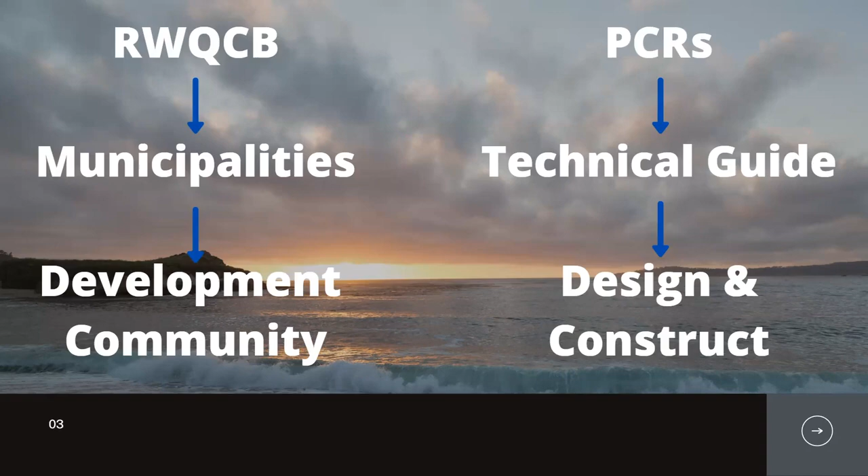One of the first questions you need to ask yourself in post-construction compliance is, where is my project located? For the PCR specifically, your question is, am I within an MS4 permit boundary? That's the municipal permit issued by the State Water Board. In general, the MS4 permit boundaries follow urbanized areas designated by the census. So if you are within city limits or within an urbanized area, likely you are within an MS4 boundary. Check with your local jurisdiction to confirm if you think you might be in or out.

Now, if you are within the MS4 permit boundary, you need to follow the Central Coast PCRs. If you are outside of the permit boundary, there likely are other local requirements that may be similar to the PCRs. And if your project disturbs over 1 acre, you will need to follow the state water board requirements for post-construction as part of the SWPPP program. What I'm talking about today is for the PCRs, meaning projects that are within MS4 permit boundaries.

Another aspect of location is where you are relative to watershed management zones. When the regional board was developing the PCRs, they designated these watershed management zones, which identify the specific requirements your project will need to follow. There's mapping for watershed management zones available on the regional board's website, often linked through the technical guides.

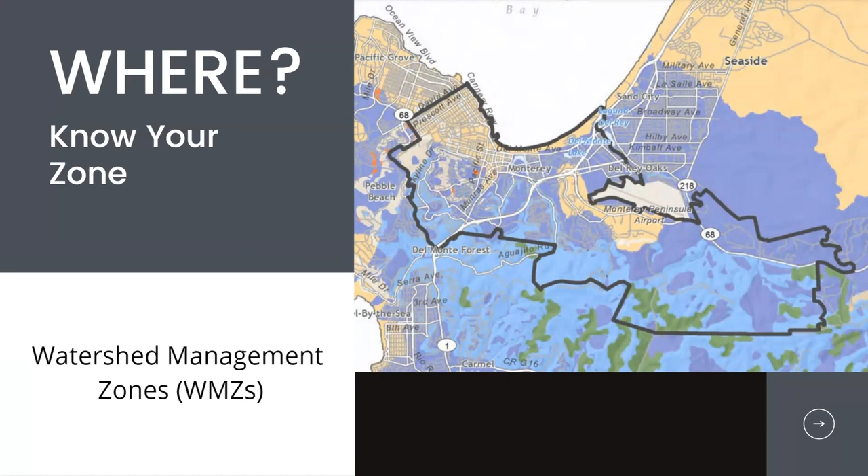Now that you've identified you are within the MS4 permit boundary, let's understand what projects need to comply with the PCRs. In general, projects that create or replace more than 2,500 square feet of impervious surface need to comply with the PCRs. There are some very specific exemptions for project types, and I've listed the more common ones here.

The first is linear utilities. So let's say you are constructing a new sewer or replacing a water line - any trenching, any removal of pavement and replacement of pavement does not trigger post-construction requirements. Another is temporary structures. If you have a structure that will be in place for less than 6 months, maybe some sort of construction trailer associated with your project, any temporary structure is not part of PCR compliance.

Maintenance projects are not considered part of the regulated project for PCRs, and there's specific criteria for maintenance. In general, maintenance of a street section means you are not changing the way that stormwater flows - that's your gut check. If you're changing the way stormwater flows through regrading or expanding a street section, you no longer fall under that criteria of maintenance.

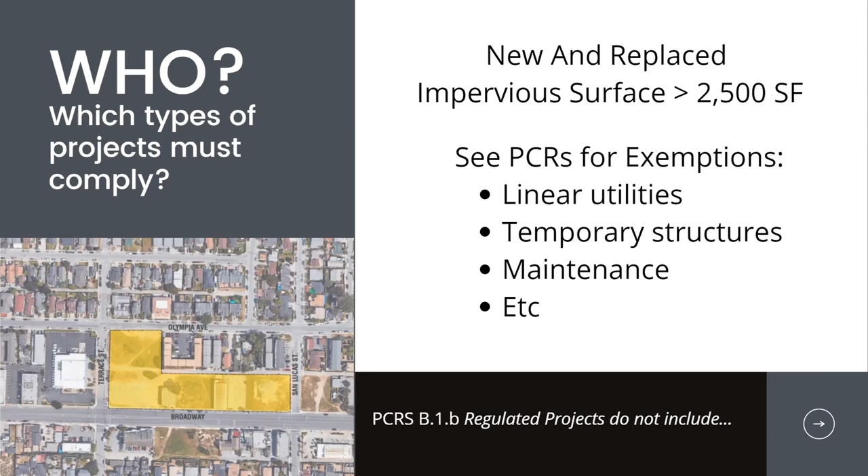This is treatment of the 85th percentile storm. PR3, or Tier 3, is on-site retention of either the 85th or 95th percentile storm, depending upon what watershed management zone you are in. Threshold 4, PR4, is peak flow management - this is matching your pre-development hydrology for the 2 through 10-year storms.

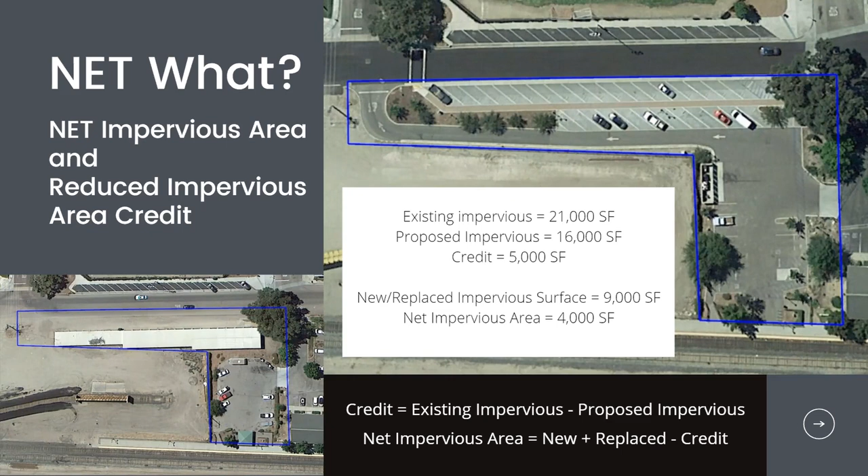In my opinion, this was a win-win. It was a win for the city because it made PCR compliance pretty streamlined, and it was a win for stormwater because we reduced impervious area, increased the amount of retention that could occur on the site, and improved stormwater quality.

What is required for submittals for PCR compliance? During the planning phase of a project, you need to prepare and submit a preliminary stormwater control plan. The purpose of this plan is to prove that your project can comply with post-construction requirements. You may use simplified calculations or typical cross sections, but you need to show a minimum amount of detail to prove compliance.

That level of detail will vary depending on your type of project. During the planning phase, work with your local jurisdiction to confirm you're providing enough detail. During the detailed design phase, your construction documents, you will prepare a final stormwater control plan with complete calculations for all stormwater design relative to the PCRs, corresponding to all elevations, inverts, and sections on your construction documents.

At this time, you will also prepare a draft operations and maintenance plan to be submitted prior to construction. During construction, specific inspections are required to comply with the PCRs, documenting the construction of your stormwater control measures, or SCMs. The engineer of record must certify that those inspections occurred during construction. Following construction, you prepare your final O&M plan, based on record drawings and any changes that occurred during the construction phase, and at that time you also prepare a maintenance agreement.

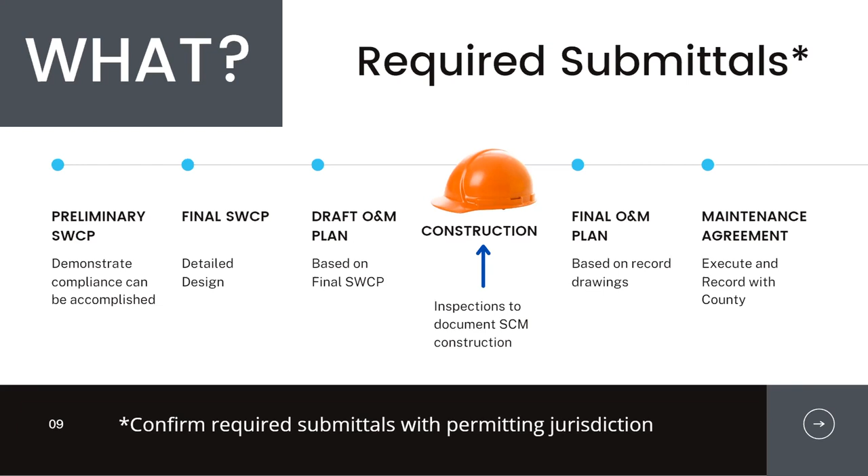Talking more about the O&M plan and maintenance agreement: the maintenance agreement is recorded with the deed and lives with the project in perpetuity. The O&M plan is an attachment to the maintenance agreement and is intended to be a living document—updated over time, with annual certifications made to show that operations and maintenance is occurring on the project.

That final O&M plan needs to outline your O&M procedures and your estimated annual cost for your O&M budget, and all of this needs to be recorded with the county assessor. That means it has to follow the assessor reporting requirements of black and white, 8.5 by 11, which includes the site plan that's part of your O&M plan. So it's helpful to be forward thinking when preparing your site plan exhibits, knowing they need to be legible in black and white on this smaller sheet size.

In addition, following submittal of all these documents, every year you will be required to submit a certification of maintenance to show that the O&M is actually being performed as described in the maintenance plan.

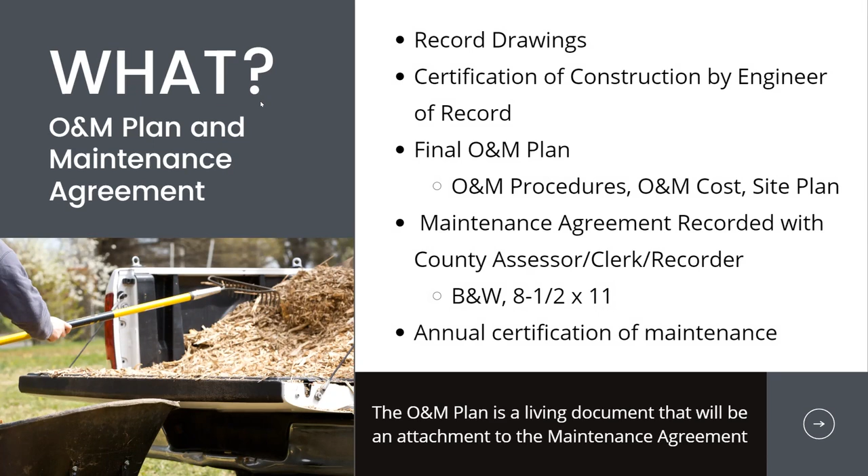Let's spend some time talking about how to comply. I will be bringing up some common questions and common challenges in PCR compliance, and the subsequent presentation will go into more detail on these items, walking through step by step the process of planning, design, and construction for an example project.

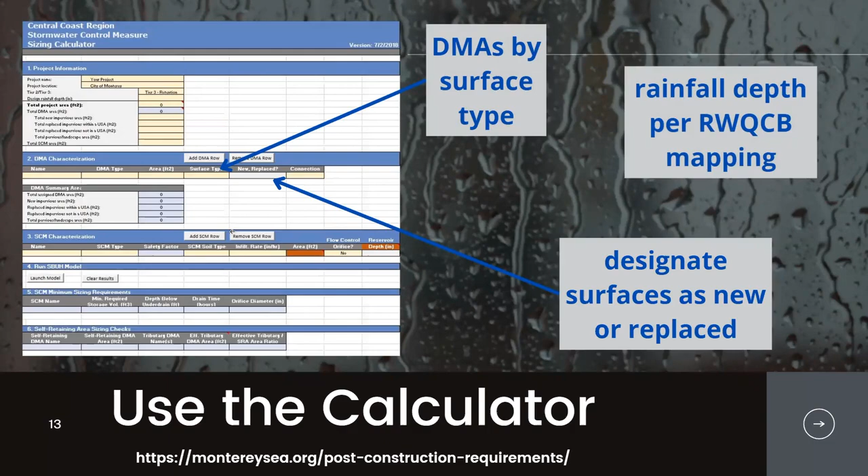Let's talk about that reduction factor for redevelopment projects. This is intended to be a credit—it's intended to incentivize and really make compliance more feasible for redevelopment projects. This multiplier is for tier 3 only, and it's for on-site retention only.

What it does is it takes your replaced impervious surface and reduces it by a factor of 0.5—it cuts it in half. So the volume that you need to retain on site is reduced compared to a surface that is new.

It's really important to understand that this is for retention only. If you are a tier 3 project, PR3 retention, you still have to comply with tier 2 stormwater quality. You have to provide stormwater quality treatment for all of the new and replaced impervious surfaces, even if you get this reduction for tier 3.

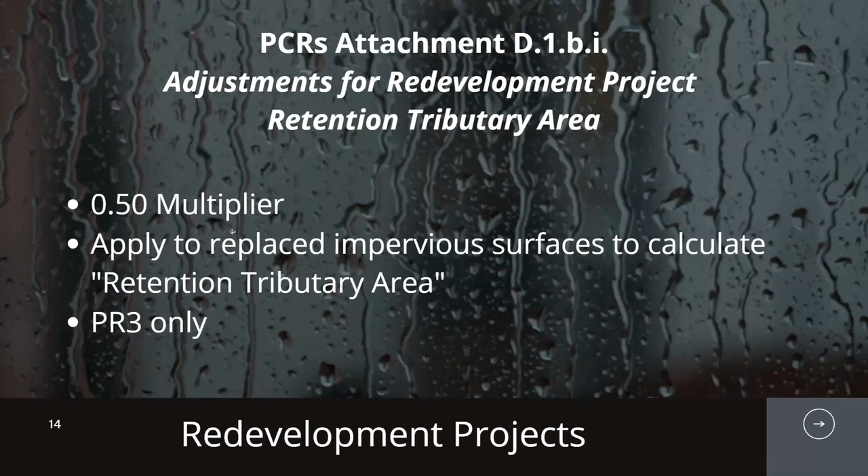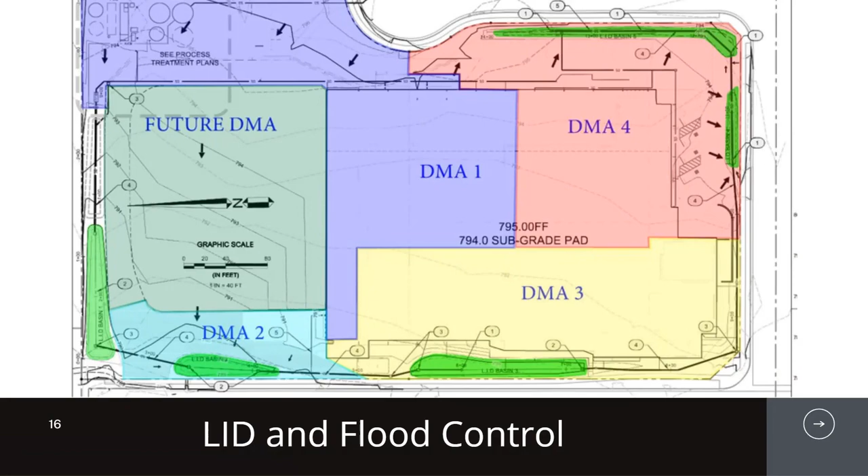The purpose of the gravel is to store runoff and allow it to infiltrate, and typically there's some level of ponding on the surface. One of the important things to note is that there should not be a filter fabric between your bioretention media and the gravel below. This is because filter fabric has been shown to clog in this use, and it can cause failure of your bioretention over time.

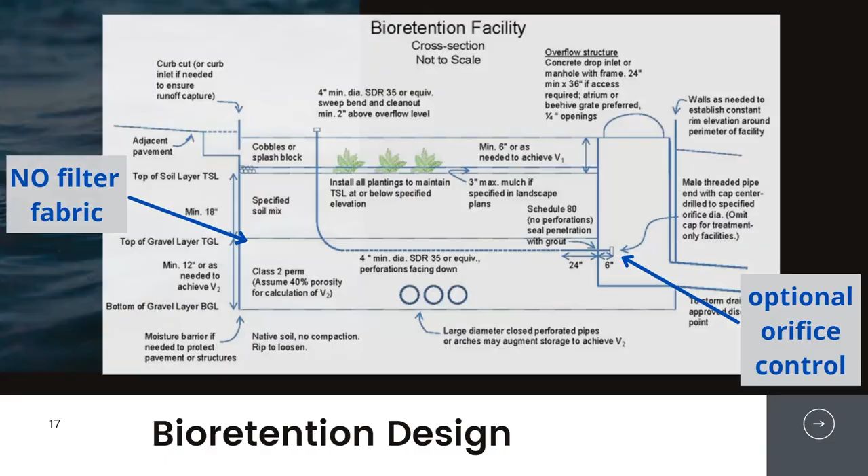Now, the downside to this is that really the only way for water to leave the basin below the elevation of this orifice is through infiltration. So if you are intending to use a riser pipe system, you want to have a lot of surety on your infiltration capacity of your soils below.

So I would only recommend this riser pipe setup in more of a sandy type soil where you have a lot of confidence in the ability of your soil to infiltrate. Otherwise, below the elevation of this orifice, you could end up with ponded water, which could cause problems for your vegetation.

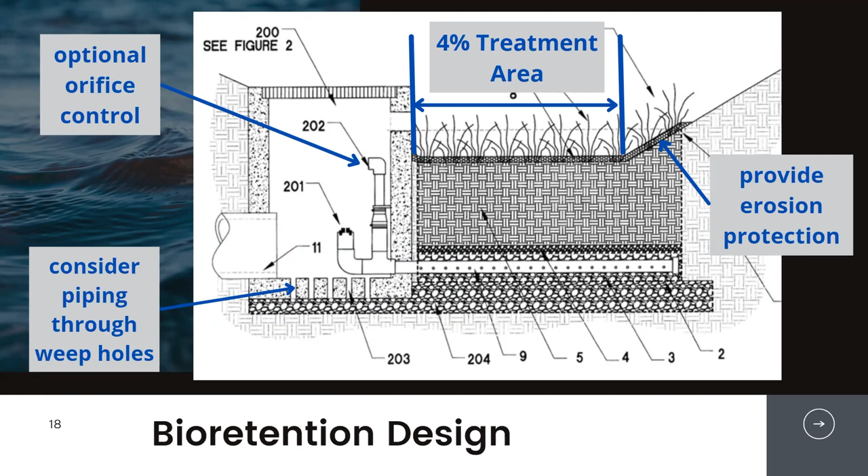One other thing I wanted to point out is the use of these drilled holes in the bottom of the concrete catch basin. This is intended to prevent standing water, and it's good practice because it can generate more infiltration area. But one thing I noticed is that these drill holes in the catch basin are really circumventing the purpose of this standpipe. So what I'm seeing is that any water stored in the media could make its way through the gravel, up through these drain holes, and out through your storm drain. This is a good idea and good practice, but be intentional about where you use them relative to the location of your underdrain and your bioretention feature.

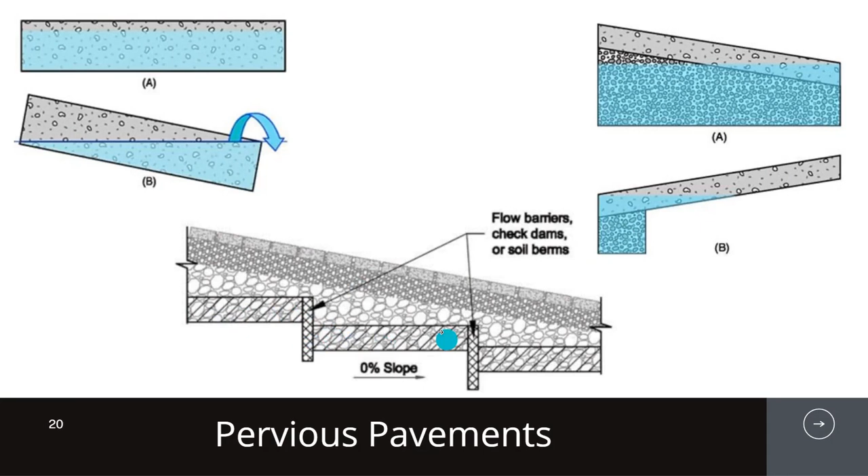One way you can accomplish something similar, but still have a greater surface area, is by using subgrade check dams, something that's going to help you create a stepped system where you're storing water and you have a larger area of infiltration.

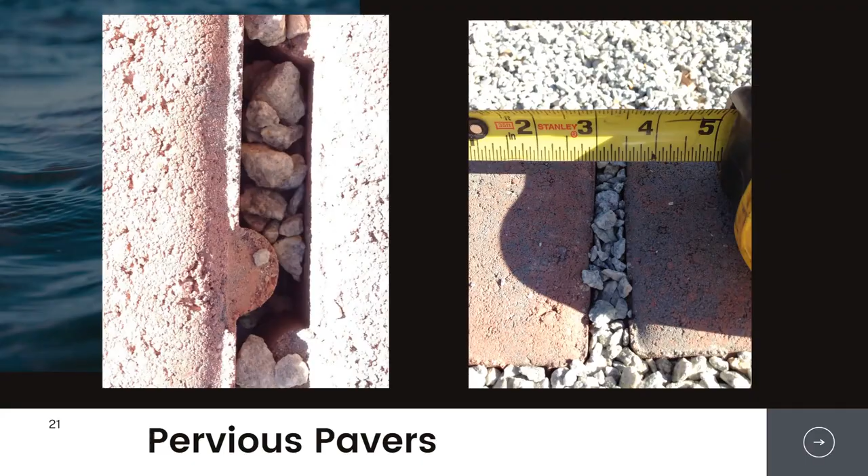In addition, especially right after construction, you're going to see some raveling—some of that gravel coming out of the gaps. You need to plan for this; it's expected and anticipated, but you need to identify who is responsible for maintenance in the first few weeks following construction, because you will have loose gravel. For these reasons, your local jurisdiction may not allow these pavers for a surface that needs to be ADA compliant, and you may need to transition to a traditional impervious paver for ADA parking stalls and paths of travel. These are a great tool, part of a suite of pervious systems, and I certainly recommend them, but you need to think carefully about where you place them and how they'll be used and maintained over time.

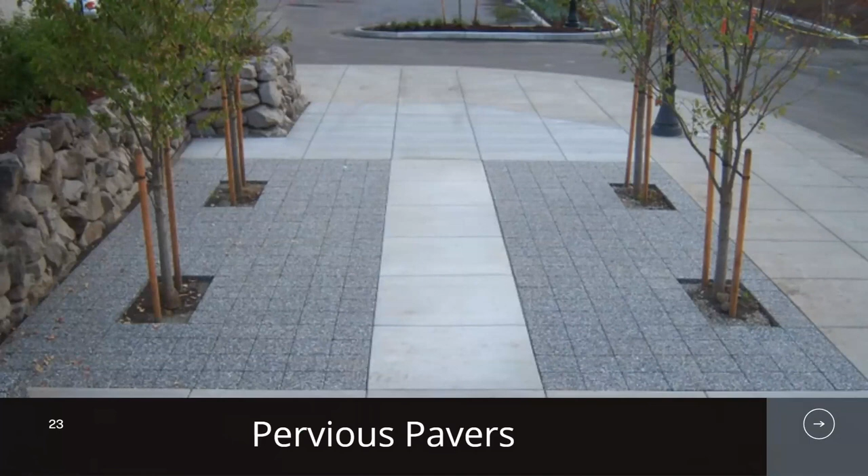Another option for pavers is actually a unit block of pervious surface—think of these as a block of pervious concrete. These pavers don't rely on a gap; the surface itself is pervious, so they're much more streamlined in terms of ADA compliance. I personally think they're better suited for projects within the right-of-way, and this example is a great use for them, being used over the root section of street trees, allowing water to infiltrate right where the trees can benefit from that runoff.

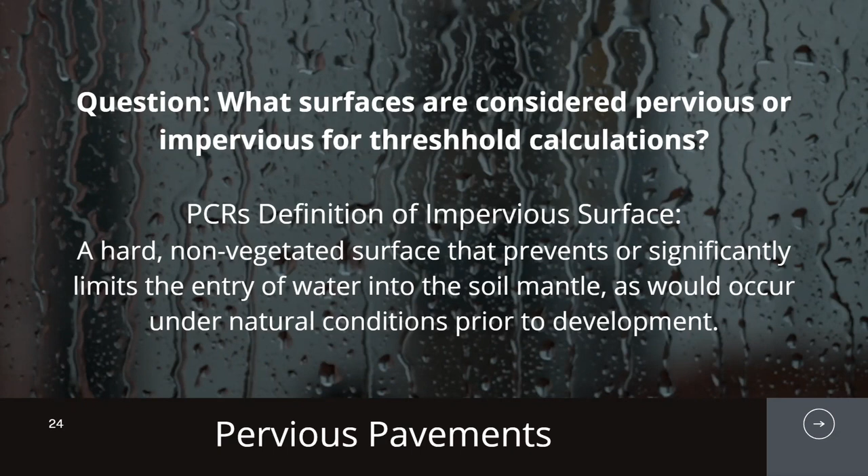One of the common questions in PCR compliance is: what surfaces are considered pervious or impervious for threshold calculations? Remember, all the tiers of the PCRs depend on your quantity of new and replaced impervious surface. How do I decide what's impervious and what's not? Let's look at the PCR's definition: a hard, non-vegetated surface that prevents or significantly limits the entry of water into the soil mantle, as would occur under natural conditions prior to development. That last part is where the judgment comes in—are you changing the way water could infiltrate into the soil prior to development? If yes, you're likely creating an impervious surface.

Always check with your local jurisdiction if you have questions on whether a surface is impervious or not.

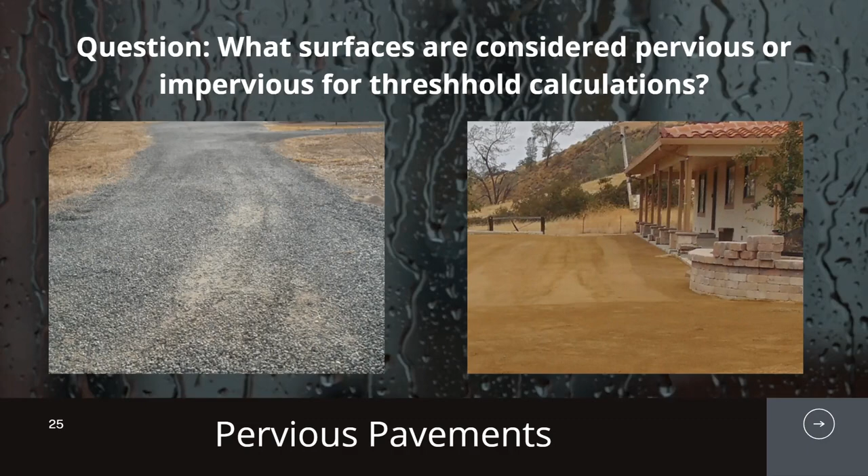The PCRs include a list of reasons why it may be technically infeasible to not provide on-site retention. One of those items is soil, item 3 in that list, sites where soil types significantly limit infiltration. The opinion of our regional board is that soil types alone do not prevent infiltration, so you may need to show more than one item on this list if soil types is one of the main reasons. Again, always check with your local jurisdiction.

One of the items I wanted to point out is what technical infeasibility means. If your site is classified as technically infeasible, this is specific for PR3 only, on-site retention, and if you qualify, this means you're no longer required to retain a specific volume. You do not have to show volume-based calculations to meet PR3.

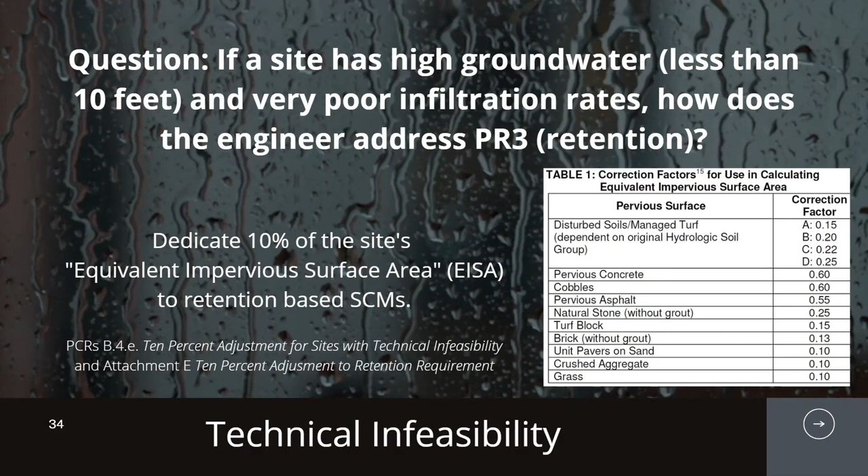When we were on our site visit, what we noticed is that there were a number of rodent holes, a number of ground squirrels burrowing from the top to the bottom. I have seen firsthand slopes have failures because of water piping through rodent holes. So if your project is within any proximity, even a few hundred feet of a slope face, you need to be working closely with your geotechnical engineer to decide if your site would be classified as technically infeasible for PR3. We did that for this particular project.

All right, next, another hot topic of infiltration testing.

Some of the common questions are: what's the difference between infiltration testing and percolation testing? How would I test for a surface stormwater control measure as opposed to a subsurface measure? How do I interpret test results? What are some appropriate factors of safety? What do I do with multiple tested infiltration rates? And what are some resources if testing is not performed?

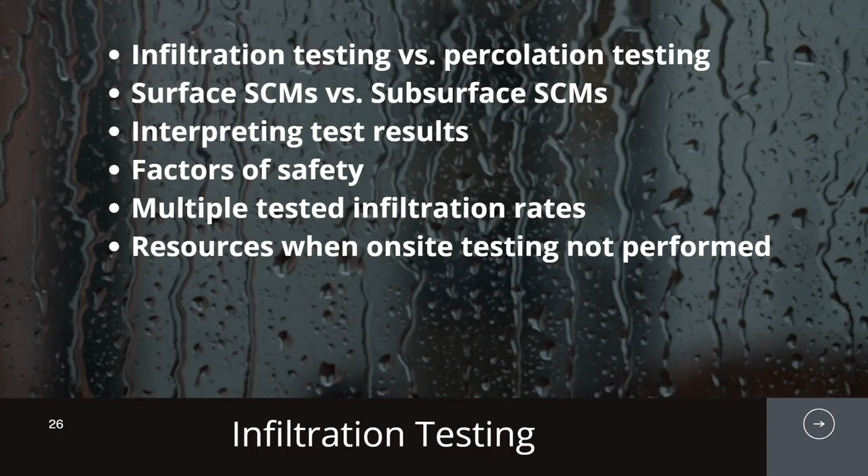In general, using bioretention as an example, you'll be at least 4 feet below existing grade. You typically have 6 inches of ponding, 18 to 24 inches of media, another 2 feet of gravel. That means the base of your facility, without any other surface grading, is probably at least 4 feet below grade, which corresponds well with the typical depth for your percolation test.

Now, the downside of the percolation test is that it does not correlate directly to a design infiltration rate. Here's the reason why: in general, in any soil profile, water is going to move faster horizontally through the profile than it will downward.

Your primary method of moving water out of your bioretention facility is downward through infiltration. Your percolation test has much more sidewall area. This vertical area of the borehole is much greater, and therefore you have more horizontal movement, which is likely going to overestimate your total infiltration capacity. Let's look at this with some numbers.

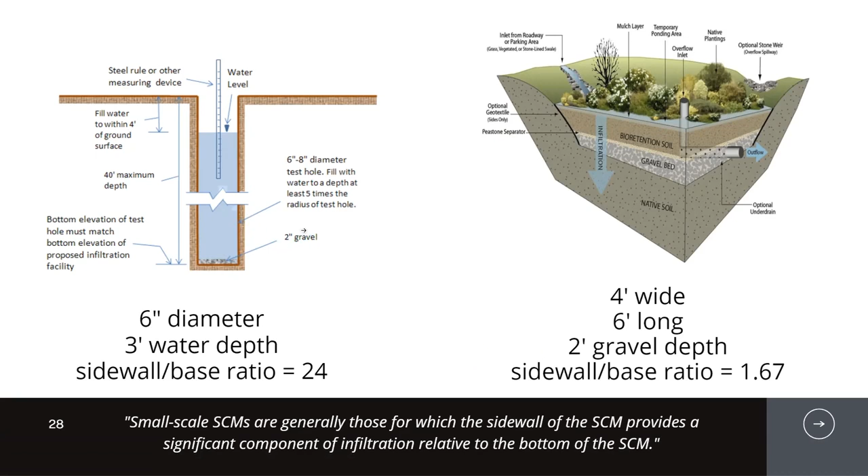So what's the solution? The percolation test has some great benefits, it's a good test, let's continue to use it. But you need to mathematically translate your percolation values into an infiltration rate, and that's done using the Porchet method. The Porchet method is basically a geometric calculation where you're taking the area of your borehole, the depth of your water, accounting for that horizontal surface area, and translating that into a vertical infiltration rate. Really the thing to know here is that your geotech needs to be taking measurements of these values and providing them to you as the design engineer so that you can run this calculation.

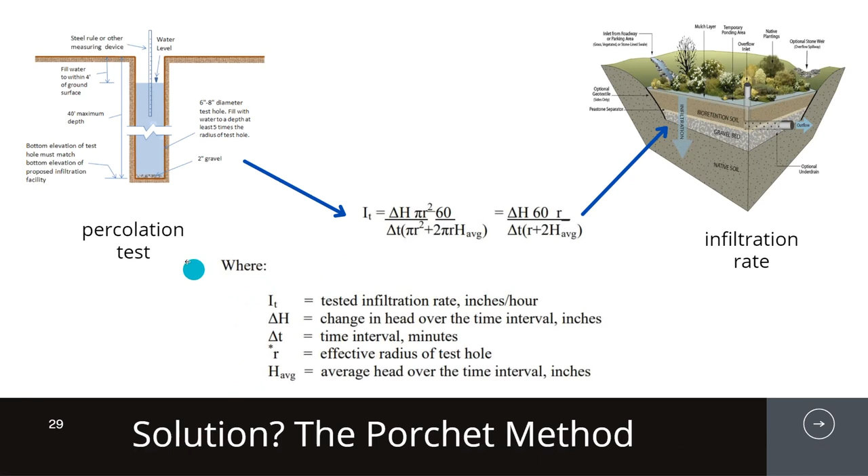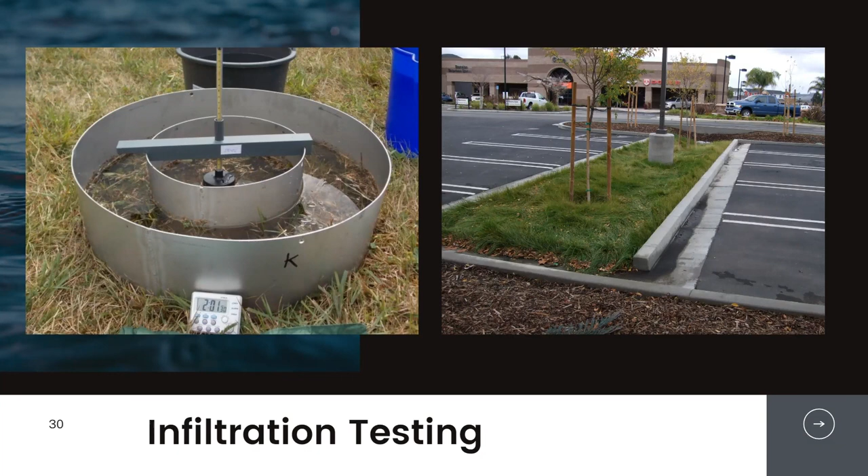So what the double ring infiltrometer is doing is creating this saturated zone around the center, and the center is where we're testing the rate of vertical movement of water through the soil. Now, by doing this at the surface in a vegetated facility, you're really gaining the benefit of the interaction of the soil and the plant roots. In that soil shown on the right, the tree roots and the roots from the vegetation are all going to increase pore space and give you a better infiltration rate. If that's what you're designing for, take credit for it, and you could do that in some cases with this double ring infiltrometer.

Now, the calculator has standard rates built in if you're not doing on-site testing, and these are based on hydrologic soil group. There's a drop down for either A, B, or CD type soils, and the calculator will automatically apply these infiltration rates. These are always available to be used. So if you don't have on-site testing, these values can be used in the calculator, and they are intended to represent a vegetated surface. If you have some other type of stormwater feature, check with your local jurisdiction to see if these rates would still apply.

There are also safety factors built into the stormwater calculator, and a safety factor of 1 is applied for bioretention, and a safety factor of 2 is applied for direct infiltration. There's a drop down for SCM type, and once you choose your type, that safety factor is automatically applied. The safety factor of 2 means you're cutting your design infiltration rate in half. The safety factor is 1 for bioretention because the purpose of the mulch on your bioretention facility is to capture the sediment that could be flowing in and reducing your infiltration capacity over time. So if you are adequately maintaining your bioretention facility, removing sediment, removing mulch, now you're providing long-term viability for that infiltration rate.

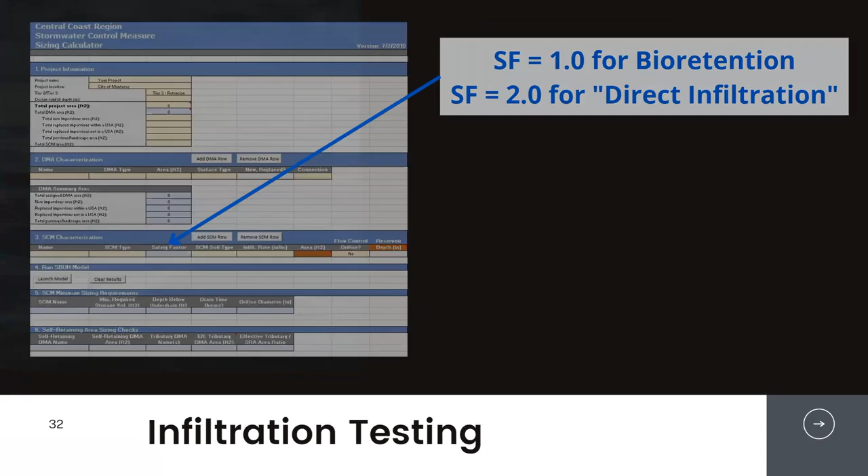Another question that comes up is for underground retention. If underground chambers are used for PR3 for on-site retention, can they also be used for PR2? And is pre-treatment required? PR2 can be achieved on a volume basis, meaning you can infiltrate water on your site, counting on the soil to treat your stormwater as it's infiltrating. So yes, you can use these chambers if allowed on your site for PR2, and pretreatment is required. This is a sentence specifically from the Monterey Regional Technical Guide that says facilities with subsurface storage require permanent structural pretreatment. So the answer is yes.

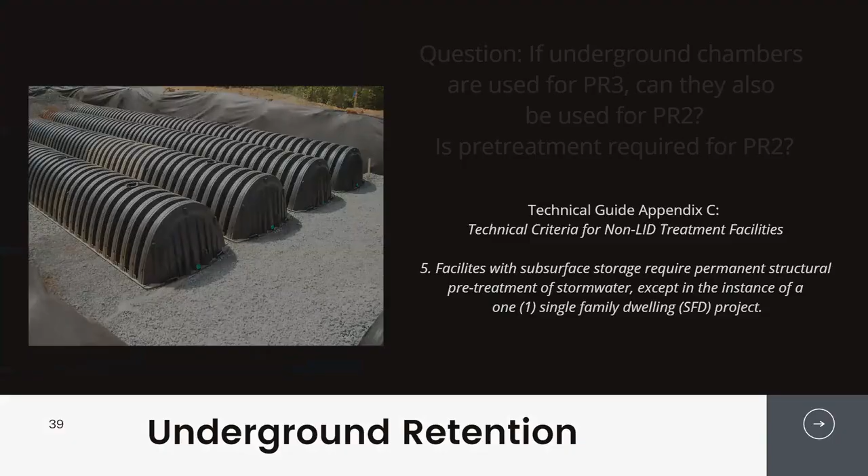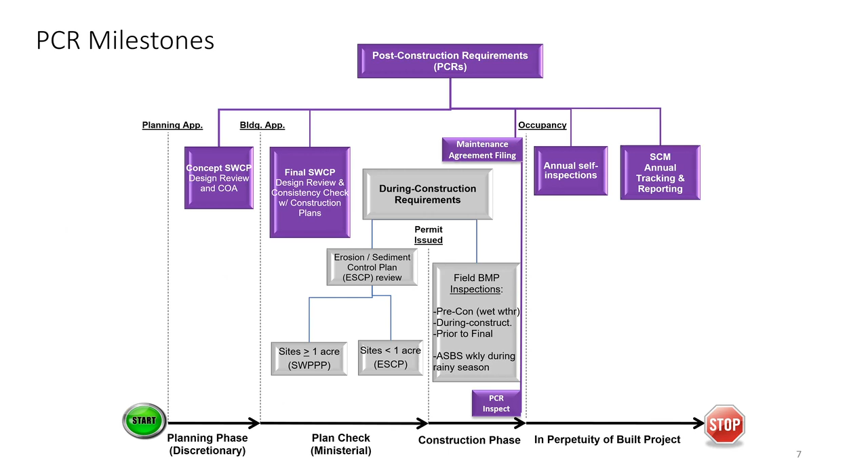As we walk through a project development workflow today and the examples and the hypothetical, we'll also be touching on the process that is primarily driven by the local agency review process. Valerie had touched on this earlier, but typically there's a planning application or discretionary review and approval phase, a building application, plan check, ministerial review phase, the construction phase, and then the project in perpetuity of that built project. So within all of those phases, there are different milestones for the PCR program and the documentation that the applicant should be submitting for our review.

So we'll start at project conception, walk through the project timeline: planning, design, construction, and utilization. Within each of these steps, there are a multitude of smaller steps, which in an ideal world, we complete in a stepwise or linear fashion. We all know that that is not the case. We do not do the project completely linearly. We do need to revisit decisions, redesign things along the way.

Unfortunately, due to time limits, we'll walk through this in a linear fashion. It may not appear from our presentation that we had to do a lot of reworking and redesign during the project, and that we hit many roadblocks. I'll just throw it out there — we did. We're presenting this project in a streamlined manner, so I wanted to encourage you: when you hit roadblocks in your design, that is commonplace.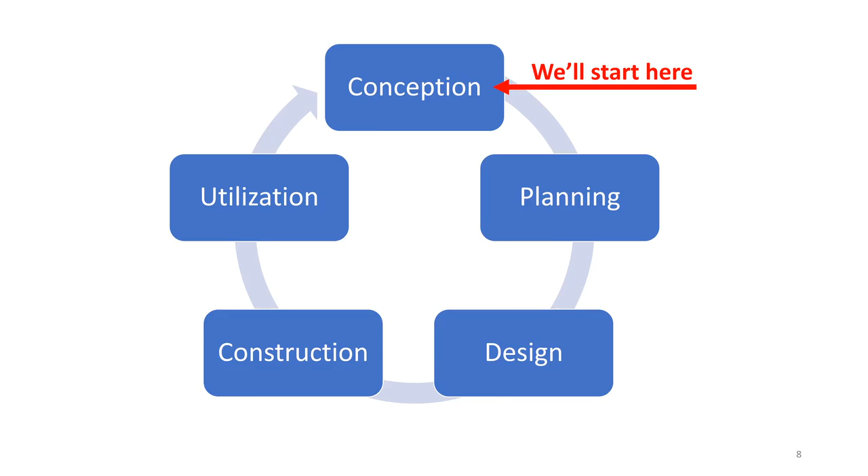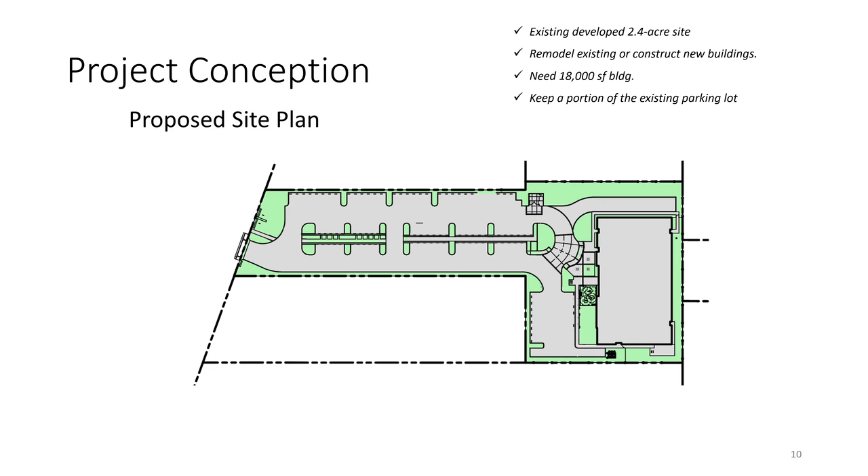The owner at this point already has his preliminary pro forma, so that's his preliminary scope, schedule, and budget. This is what we all think when we're at this stage of the process. Unfortunately, things get complicated as we move through the project — the devil is in the details.

Tricia, yeah, you want to take it?

Sure, you bet. Some reflections on that upfront project conception phase: it's super helpful to get a good feel for the basic metrics of your proposed development project — the location, the size, the development type — so that when you have questions or come to a counter at the local agency, you'll have enough information for us to talk through that. Gather as much regulatory info, utilize the resources and guidance Valerie's talked about and that we'll talk about today. And if you still have questions after reviewing all that guidance, seek guidance early. If we can have pre-applications and a counter discussion, that will help streamline the entirety of the development review for PCRs through the rest of the project's workflow at the local agency.

Yeah, so just to reiterate Tricia's point, I find pre-application meetings to be very helpful, just to get everyone's eyes on it and have everyone see the things they are expecting and may see down the road based on a very preliminary site plan. Also outreach, such as this, for architects and planners especially, is very helpful, because frequently they're the first ones to start looking at a project with an owner. I'll also flag that building size and site layout are frequently already essentially set at this stage.

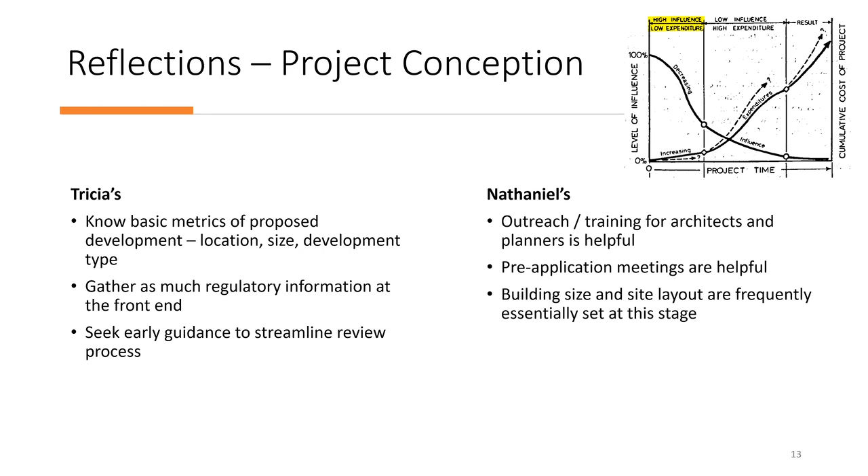Now we move into the planning stage. This is really where I, as the engineer, and Tricia, as the reviewer, start to really engage in the project. These are the questions that we are going to need to answer.

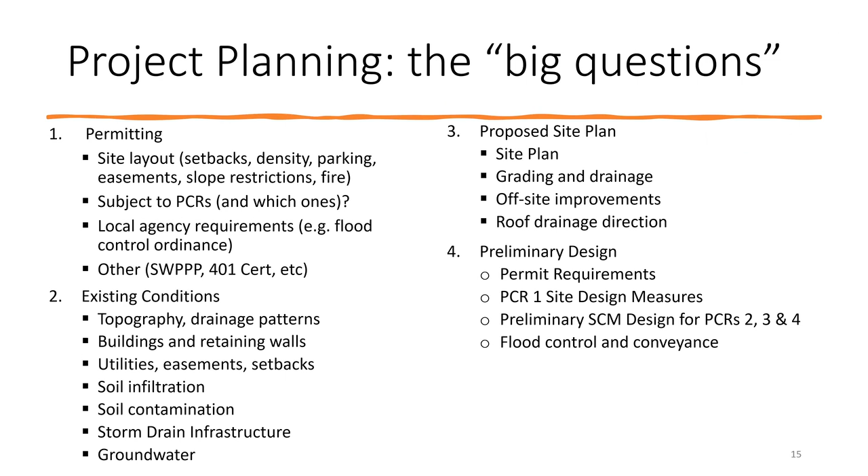I'd like to give a huge shout out to the authors of our stormwater control plan template. The way it's set up, the stormwater control plan walks the designer — that's me — through the decision-making process with the most basic and fundamental questions up front, before getting into the meat of actually designing the stormwater control measures. I appreciate the implicit reminder in the template that we need to go through these questions before we just jump into design.

So again, this is our site map showing the limitations that have been identified so far, by the owner and the architect. The other things on my radar but not shown are: general site grading, site drainage, utilities, pedestrian access, fire department access, and slope restrictions. This slide shows my preliminary thoughts on those items.

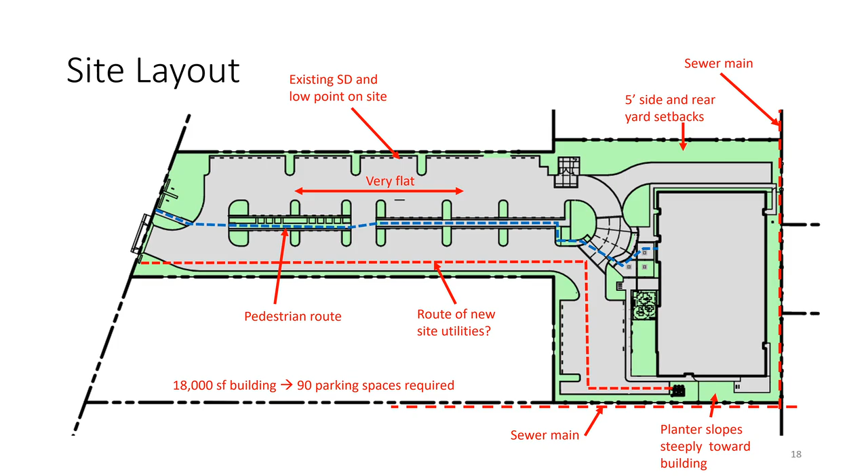So now at this point, we've got a preliminary site plan. We can start walking through the stormwater control plan to determine what post-construction requirements apply and what other permit requirements are going to apply. We're going to walk through this slide and the next dozen slides rather quickly — I consider these checklist items. In real life I do go through these very quickly, but even though they are checklist items, it is important to go through them so we can flag if there are any items that need further attention.

For watershed management zone 1, we've got way more than 22,500 square feet of impervious area, so we've got all the PCRs applicable to our project. I met with Tricia — there are no other local agency requirements for our project. The only other permit is a SWPPP, because of the size.

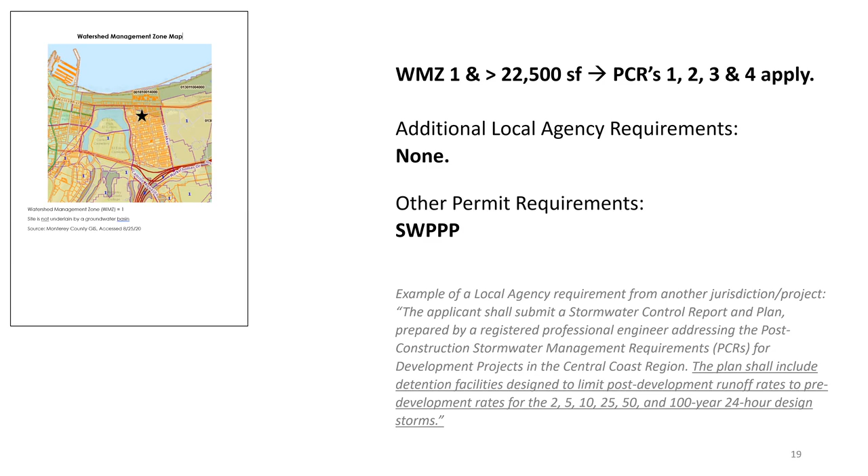It's important to know these watershed management zone determinations up front, especially for larger projects that will trigger PR3, performance requirement 3 retention, and PR4, peak flow management.

This is a screen capture of the City of Monterey's public GIS portal, which gives you information such as whether or not you're overlying a groundwater basin. A lot of local agencies may have a mapping portal for this information, but it's also available on the regional board's website.

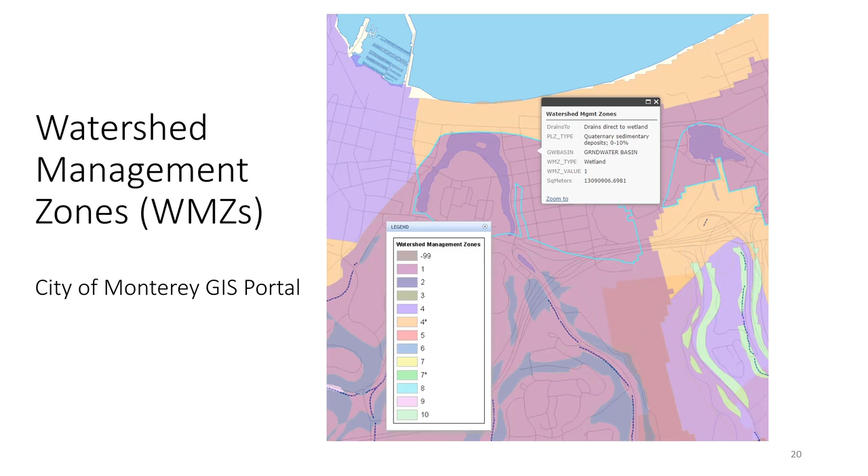Next I'll look up precipitation: the 85th percentile, 95th percentile, and the 2 and 10-year storm events. I'm not going to read over all the info on the slides, there's a lot there, and it will be posted later. I did try to include the links as we go along.

Next I'll look up floodplain. We do not have any floodplain concerns. I also looked up drainage, and we don't have any drainage channels.

Soils and groundwater on this particular site - unlike the past few slides, we did actually identify the groundwater and any deep stormwater control measures we might install, such as underground chambers.

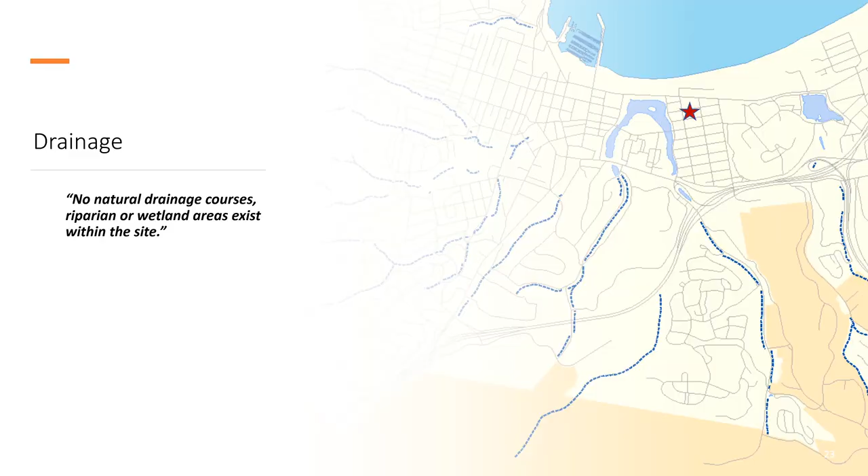In my project timeline, at the beginning of the process, I looked up the soil survey information that told me my saturated hydraulic conductivity of the soil is 6 to 20 inches per hour.

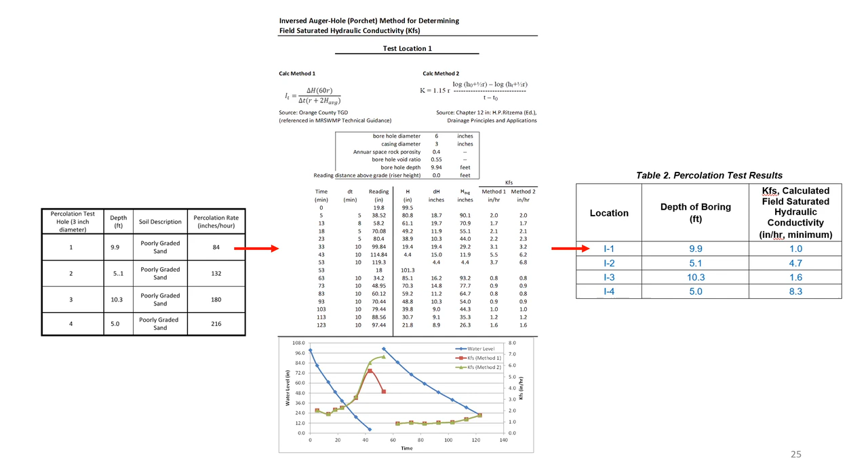Setbacks to structures and slopes: when we were preliminarily laying out the bioretention areas, I identified that one pond would need to be located less than 10 feet from the proposed building. I coordinated with the geotechnical engineer, and he determined it would be acceptable to place the pond closer than 10 feet, provided we had mitigation. The mitigation in this case was to provide a liner on the side wall that was closer than 10 feet to the building.

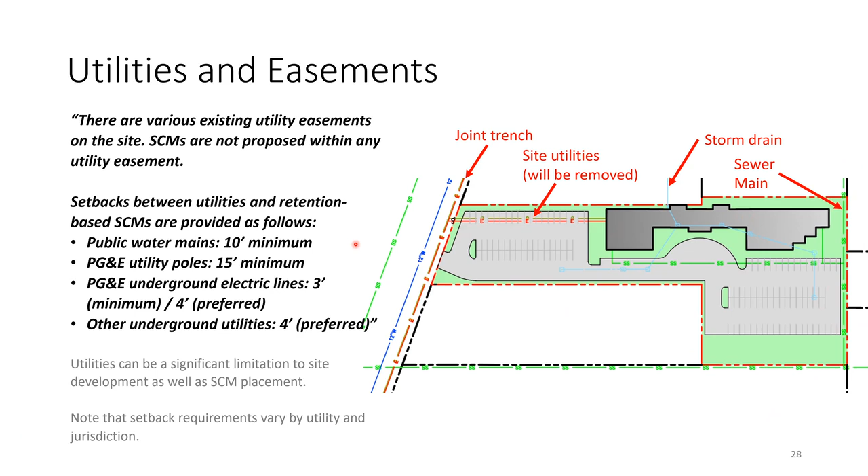Underground hazardous materials - also no issues identified there.

So now we can finally start looking at our stormwater control strategy, beginning with tier 1. The MRSWMP template is on the left-hand side of the screen, and what I ended up writing in my stormwater control plan template is on the right-hand side, replacing the template's instruction text with my proposed text.

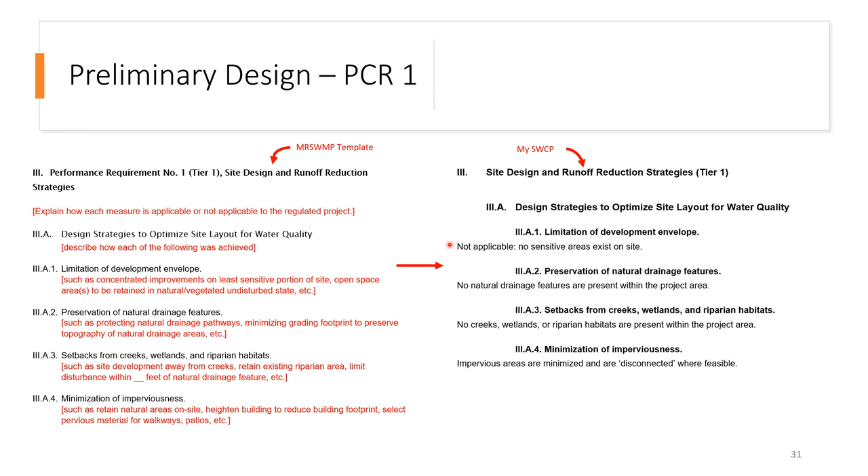For those of you who prepare stormwater control plans - I prepare quite a few of these - in my template I've saved sample text. Some people call this a go-by rather than a template, but that way it's text I can quickly copy and paste, and I know it's gotten through the gauntlet of review on prior projects, so it's pre-approved in a sense. I find that very helpful and expeditious.

The minimum tier 1 measures - formatting-wise, I've put that in a table in my stormwater control plan.

You'll notice in this sample project I am proposing pervious pavement as one of my tier 1 measures. This is not because we need the pervious pavement to meet the area and volume requirements, but because the owner wanted it - they wanted the aesthetics and just liked the idea. So that was, in my mind, a perfect situation to use pervious pavement.

Tricia, if you wanted to say anything on these, just please hop in.

Sure, I might just remind people, as Valerie said and Nathaniel's talking through here, tier 1 features are super important - they're required on all PCR projects. There are sort of two parts to tier 1, or performance requirement 1. A lot of people might think all they need to do is say we don't have drainages coming through the site, we've minimized impervious surfaces, but there's this really critical piece where there does need to be a selection of one of these runoff reduction measures.

And so that's something that if I don't see something clearly in the stormwater control plan, I will flag that. Yes, I know I've gotten that plan check comment from you on numerous occasions in the past.

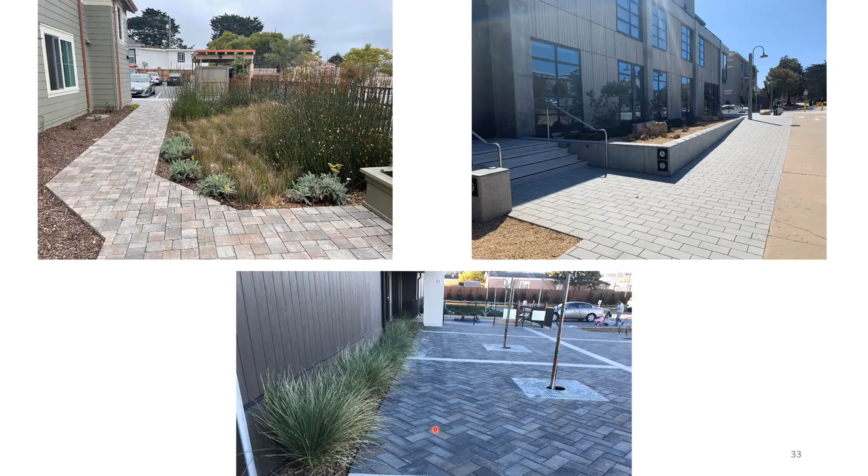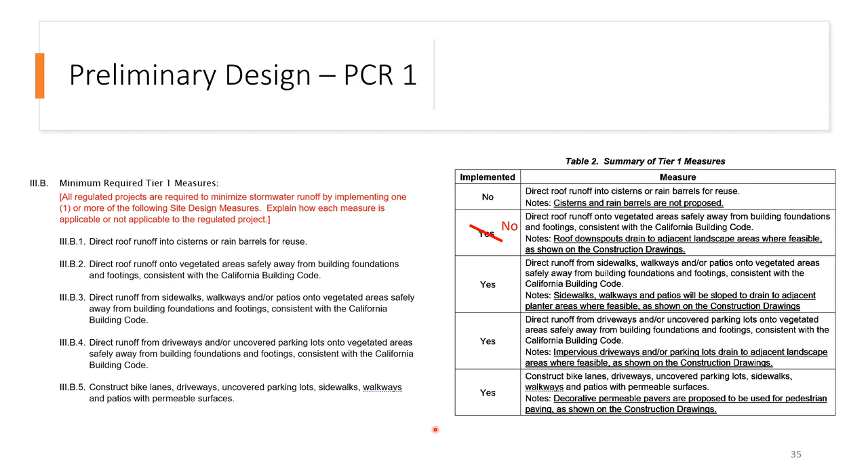And I'll just flag here - we'll talk about this briefly later - midway through design we found out that, in fact, we can't take the roof downspout disconnection credit. So in my preliminary stormwater control plan I had a yes there, but in the final I had to put no there because of grading complications.

So we're finally at what the designers think of as the meat of the stormwater control plan. This is kind of my overarching paradigm.

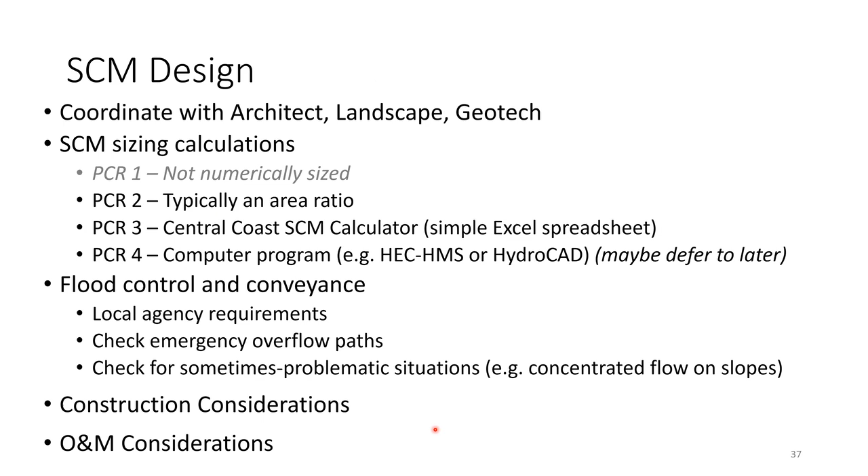Then I preliminarily sized my stormwater control measures. The bioretention ponds are going to do the heavy lifting in this design. Bioretention ponds are the least expensive, on a per square foot of impervious area treated basis, stormwater control measure that we have. They're the least expensive up front and least expensive on a long-term maintenance basis. So I love bioretention ponds.

So we already discussed PCR1 - it's not required to be numerically sized. PCRs 2, 3, and 4 we are going to meet, like I said, primarily with the ponds. Obviously the pervious pavers do provide a benefit as well, but the heavy lifting is going to be the bioretention ponds.

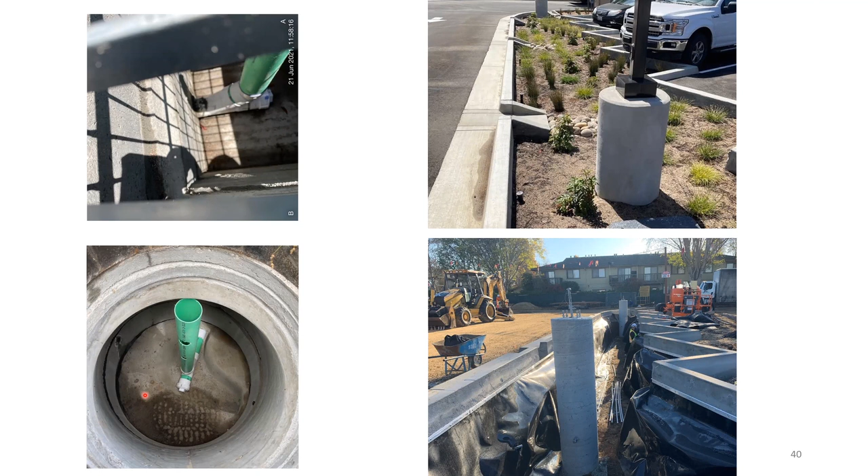There are a couple other things I wanted to flag before we move on. My initial concept for a bioretention pond at 6% had plenty of space in this planter. Things start getting squeezed with that bioretention pond, so I start looking at other planters. This planter is obviously not going to help me, it's got other stuff going on.

I end up with a 3-to-1 slope down to the pond bottom. I end up with a transformer. I ended up with a joint trench. So this is an exact scenario...

...where we start with the 6%, which is very comfortable, and we're in good shape to still meet our 4% area ratio at the end. If we had started it at 4%, we would be very lucky to have 4% at the end. You don't want to be pulling your hair out when you find, for example, that there's a PG&E transformer in your pond that you all of a sudden need to reduce your pond to accommodate. So if I start with 6%, I'm very confident I'm going to have the required 4% at the end.

Final point before I move on: you'll notice we've got some rather tall curbing here, some tall light foundations and liner. That's in part because we only provided the minimum 6 inches of soil bench between the back of curb and the excavation wall. In hindsight, we could have simplified this whole thing if we had started with a 6% area ratio and then planned on 2 feet between the back of curb and the excavation wall. This rather robust perimeter is because we started at a 4% ratio to the back of curb.

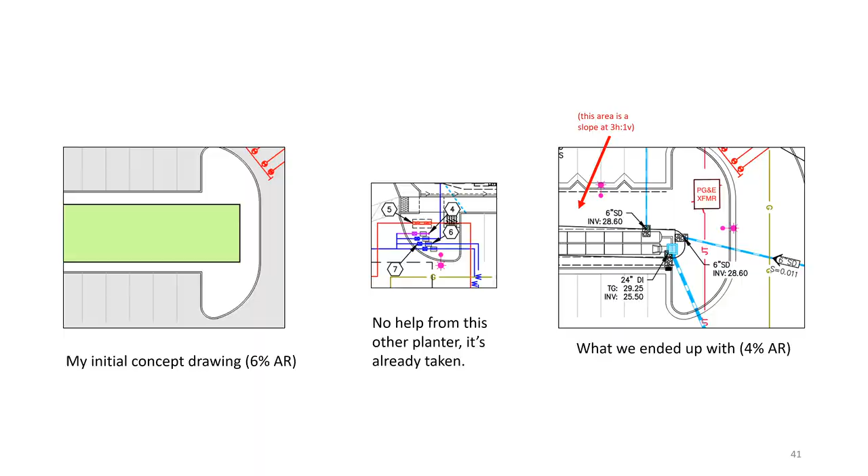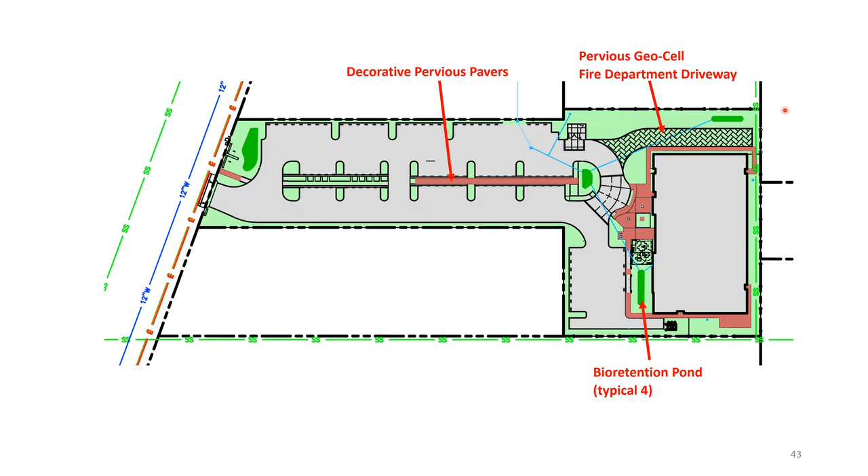So, I'm happy with my site plan at this point. The last thing I'll mention about the site plan is roof drainage. As mentioned before, bioretention, as well as other SCM types, really prefers to receive surface drainage. As soon as you put water into a pipe to get that pipe to daylight into the pond, that pond is going to need to be about 2 feet deep or more.

Unfortunately, our building has downspouts at the rear of the building. This is typical, and it's problematic in this case because we can't get those downspouts to splash to grade and then get a flow line graded all the way to our ponds.

Also, there's a sewer main along the back of our property, so we cannot put a pond immediately behind the building. That means we have to pipe the water into the ponds. So now these 2 ponds adjacent to the building aren't 6 inches deep, they're 2 feet deep just to receive those pipes.

This is totally acceptable from the PCR standpoint, and totally acceptable from a design and functionality standpoint, but it does have a couple of drawbacks. A bioretention pond that receives just surface drainage is 6 inches deep or a little more, so you have some freeboard and can use your whole planter.

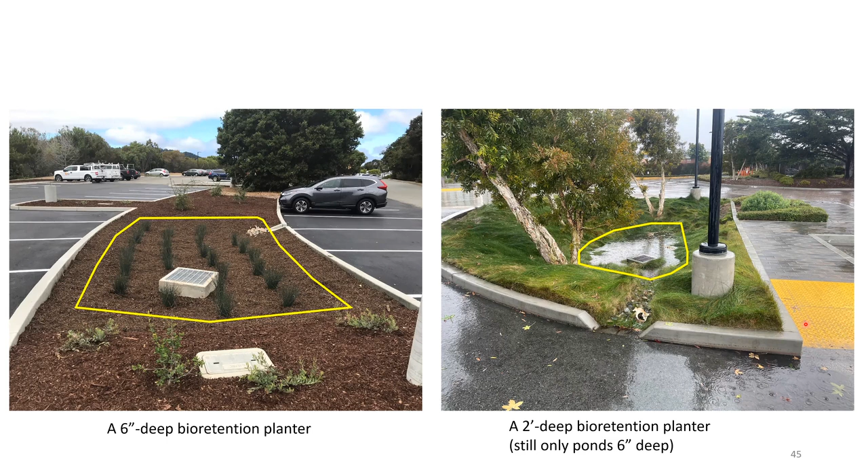The second thing, and this may be a personal preference, I like the way bioretention ponds look when they're shallow—I think they're very aesthetically pleasing. Once you get to deeper ponds, like this 2 to 3 foot deep pond, they look more like a pond, and I find them less aesthetically pleasing. Also, the side slopes suffer a little more from erosion. This guy has no erosion problems on his side slopes.

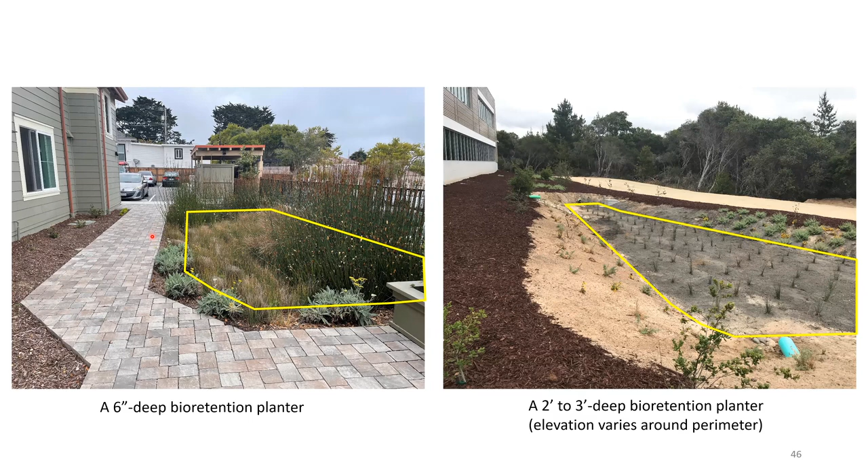Okay, so that was PCR 2. I sized my ponds—they're between 4 and 6%, and I'm happy with that. So now I run my PCR3 calculations.

This is the calculator that Valerie mentioned. You put in the pond areas, put in your tributary areas, and it calculates your depth and volume. The calculator either gets copied and pasted into the stormwater control plan or into an appendix of it. This is my summary table that goes into the stormwater control plan—that's the retention volume below the perforated pipe. Again, shout out to Dan Cloak for putting this calculator together. It is great, and I love it.

So for PCR3, I did forget to mention—the output of this exercise was we're proposing 2 feet of drain rock. It calculates to about 1.5 feet.

So PCR3 is done. Now we run the volumetric analysis. The inputs you need, some you'll find in table 8 of the PCRs. You need all of your drainage management areas, your stage storage discharge table, and for your pond you need a pond design. Then you can set up your model.

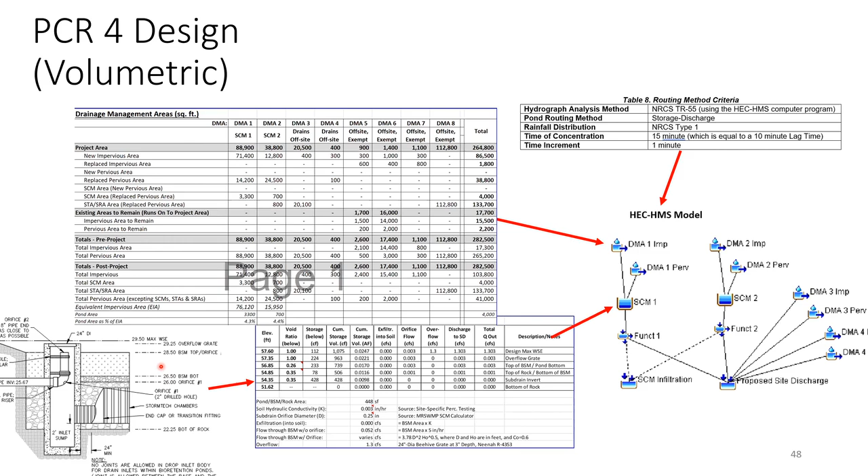Again, we're looking at a redevelopment project, so I'm going to shoot for a 6% area ratio for my ponds. I'm going to run it through the Central Coast calculator spreadsheet, which gives me my rock depth. The rock depth isn't very great because we get that 50% credit for all the replaced areas. At this point, I'm going to run the calculations through HEC HMS for PCR 4. This is a redevelopment project, so I'm very confident the pond design we already have is going to just work, because for PCR 4 we get a credit for all that existing impervious area.

If it were a greenfield development project, there are some other rules of thumb, again just to have something to start running the calcs with. But for a redevelopment project, the standard pond typically works—we don't even have to have flood control orifices a lot of times.

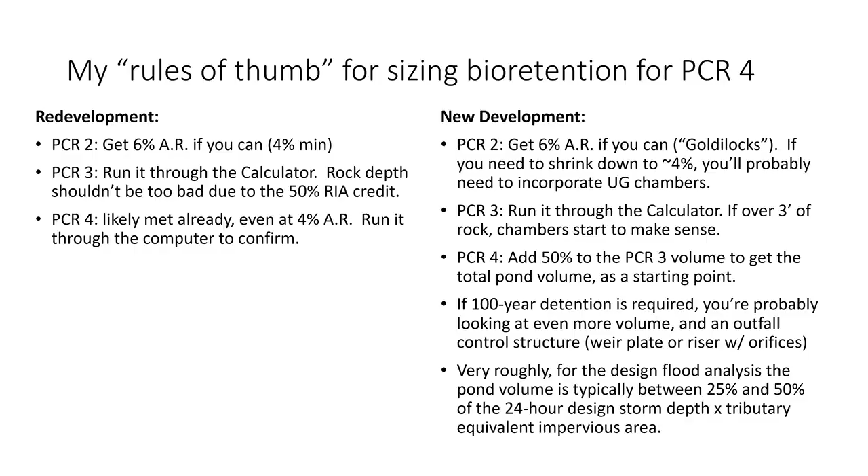So a couple of just real quick tips on checking these. First, check that the pre-development and post-development site areas are identical. We need to be comparing apples to apples, so those two areas need to be identical.

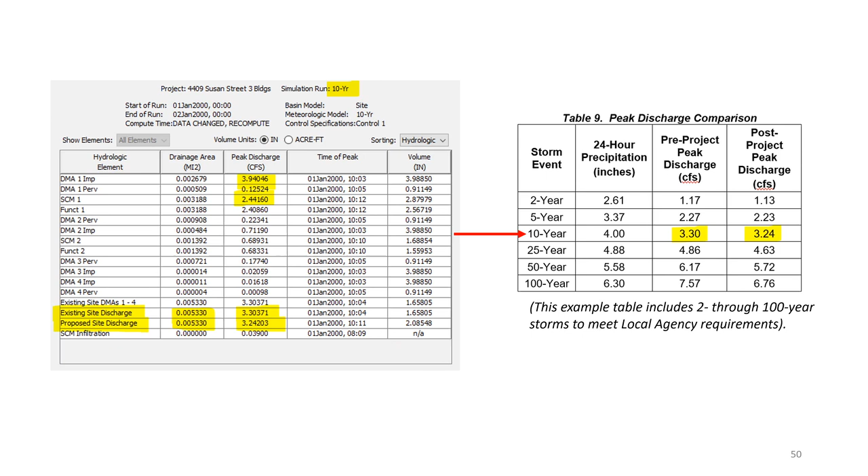So this was PCR 4 and local agency drainage requirements. Finally, I'm going to check emergency overflow paths. Agency requirements vary on this analysis, but I think of it in these terms.

The design storm is the storm which we analyzed numerically in the previous slide and sized our pipes for, our catch basins, our ponds. What we're looking at here is the emergency overflow path. This could be called a pre-mortem, if you're familiar with Gary Klein.

For the types of project that I work on, this isn't necessarily a numerical exercise. The primary thing I want to confirm is that if the storm drain system has become clogged, if there, whatever has happened, no maintenance has happened, that there is an acceptable overland release path. And in no possible scenario do we have the building flooded, or do we cause flooding on an adjacent building.

So my analysis for this one was as simple as I looked at the grading plan, pretended all my storm drains were clogged or who knows what, and we've got overland release, in this case actually through the frontage, which is preferable. So the calcs are done.

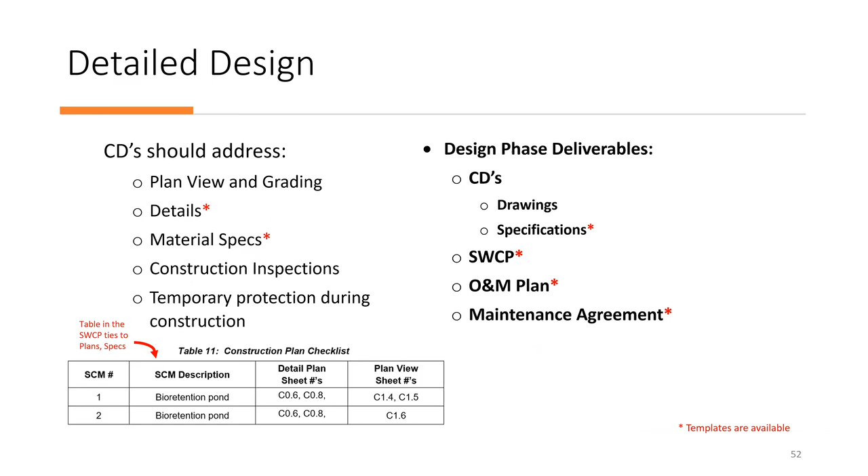We can focus on the construction documents. The construction documents need to contain all of the detailed information that the contractor needs to know to build the facilities.

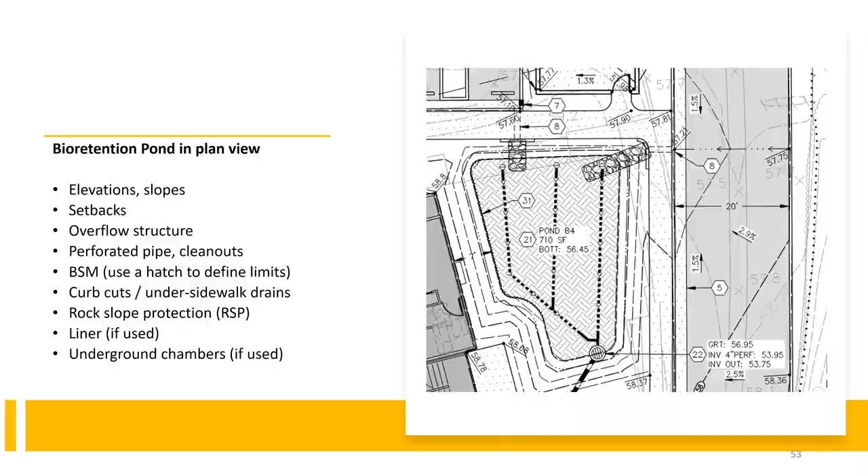Remember your audience when preparing your plans and specifications. Construction workers do not have an engineering degree, so they like things to be well spelled out and clear on the plans. Also remember, the construction contractor does not see the stormwater control plan. That's a permitting document. The contractor only sees the plans and specifications.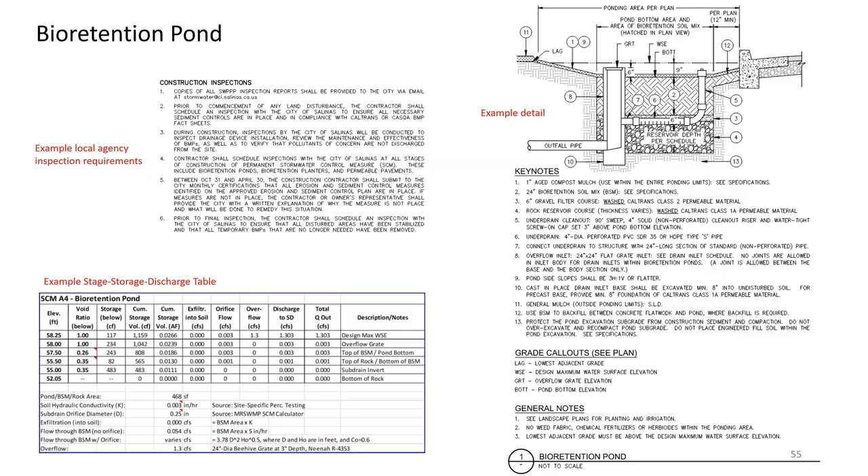These are some example sheet specs. A couple of things I recommend including: construction observations, that's the engineer of record's observations. We do not want to be at the end of a job and find out that the contractor has installed the rock and the BSM without calling us out to do our observations. So I include my observations, and then I do address as well as I can scheduling and pollution prevention.

This is huge. We need to protect stormwater control facilities from contamination during construction, so we need to tell the contractor what we expect of him. Again, as mentioned earlier, these are specific notes from a very specific job and a very specific jurisdiction with a specific timeline, not applicable to all scenarios and situations.

Water does run downhill. I've seen plan notes say no construction water shall enter the bioretention pond. In general, that doesn't work, because the bioretention pond is at the downstream end of the watershed generally, and so it will receive water when it rains from the construction, from its drainage area.

So we need to give the contractor specific and implementable instructions on what he's going to do to keep that pond from getting sedimented or otherwise damaged when it does rain. We shouldn't give them vague, not really implementable direction. It's not helpful. If we cannot articulate to the contractor what we want him to do specifically, he's also not going to know what we want him to do.

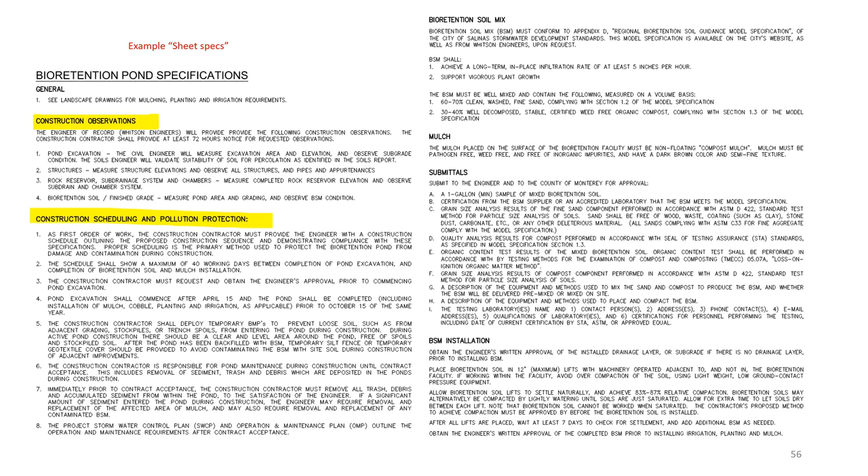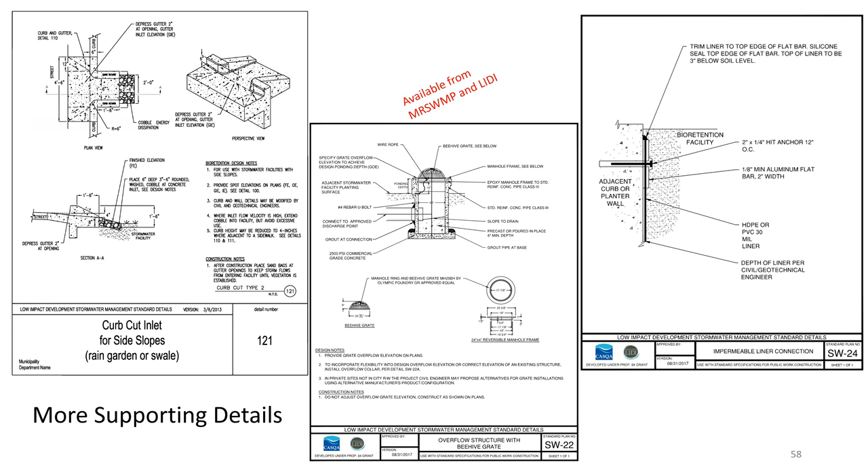Example specification page, if there are book specs, some more supporting details. These are from the Low Impact Development Initiative. So now we are at the end of the design phase and into construction.

These are the primary points I'm going to discuss. Review of submittals and inspections and observations are how we confirm, as the engineer of record and the local municipality, that the project is built in conformance with the plans and specs. So we use these as the basis of our certification of the completed project.

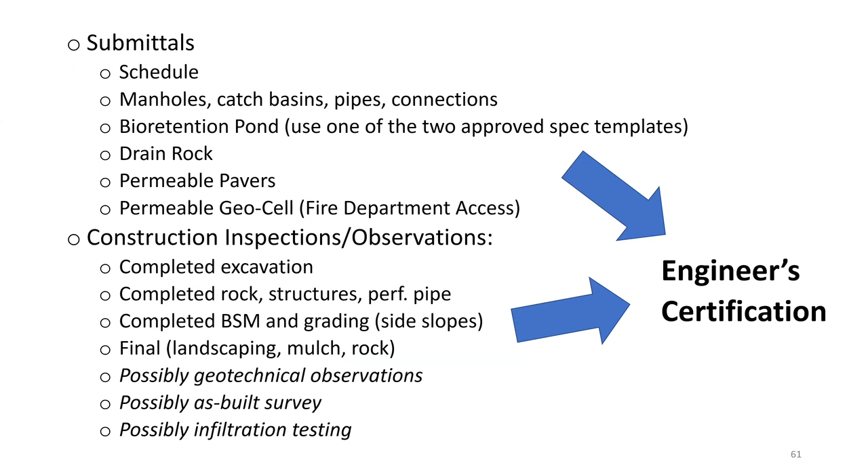The observations that I perform for bioretention ponds include the pond excavation, drain rock, pipes, and structures. This typically requires two visits: one for the completed excavation, and then typically the second for the rock and pipes and structures.

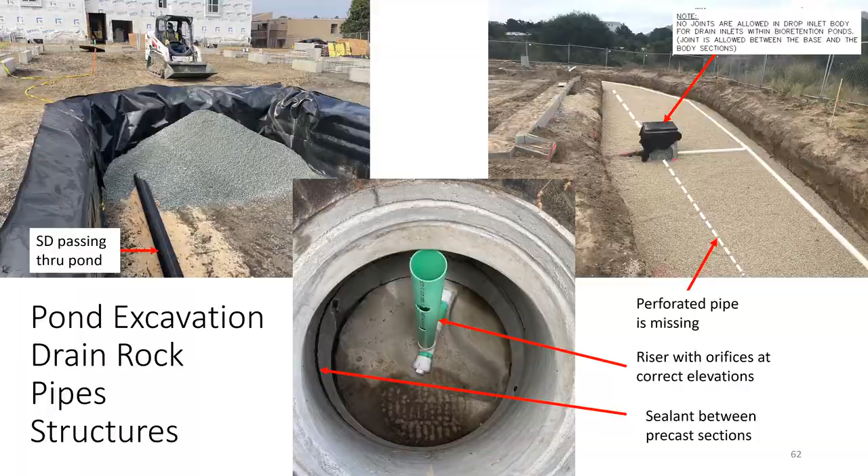Then I observe final grading and landscaping, so we see the final graded pond and final landscape pond. There isn't strictly a need for separate final grading and landscaping reviews, but I've personally found it helpful to have both, so that if we do see any issues with the grading, we can have them corrected before they start installing irrigation and landscaping, because that's a much bigger headache for the contractor if they've got irrigation installed and then need to regrade.

Also, I'll point out in this example we put the bioretention soil on the shoulders here, so six inches on top of the native soil. I think that actually really worked well. It kept the native clay soil from creating nuisance erosion into the pond during construction, and it also allowed us to do a very small amount of fine grading just within that BSM layer.

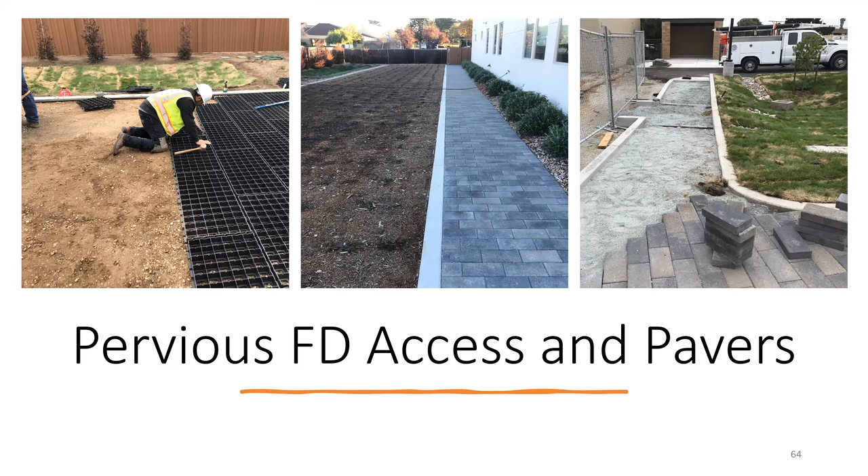Similarly, we performed observations for the other stormwater control measures on the site. At the end of construction, we complete the engineer's stormwater control measure certification. The municipality may also have certifications that they need to complete. If there is a SWPPP, the QSP will also need to certify that the project has been completed.

These are the City of Salinas forms, just as one example - not every local agency has forms. So if a local agency doesn't have language, I typically use the City of Salinas as a kind of baseline to copy from. So now we're all done with the project.

Just kidding. We totally forgot about the maintenance agreement again. Yes, and Nathaniel, did you want me to?

So from the local agency process standpoint, we're not quite done. We do need to work on executing a maintenance agreement with the property owner prior to final occupancy for the project. And so we have three important exhibits attached to that maintenance agreement. But what I'll do is just point out what I feel is the most important one, which is Exhibit C for us - it's the O&M plan.

The O&M plan contents, as Valerie had noted, have particular items that need to be included in them, but that document is a standalone document for the owner - the current owner and any future owner. So I just want to point out how important it is for that O&M plan to be accurate and fully detailed, so that any future owners can understand the needs for those technical stormwater facilities into the future.

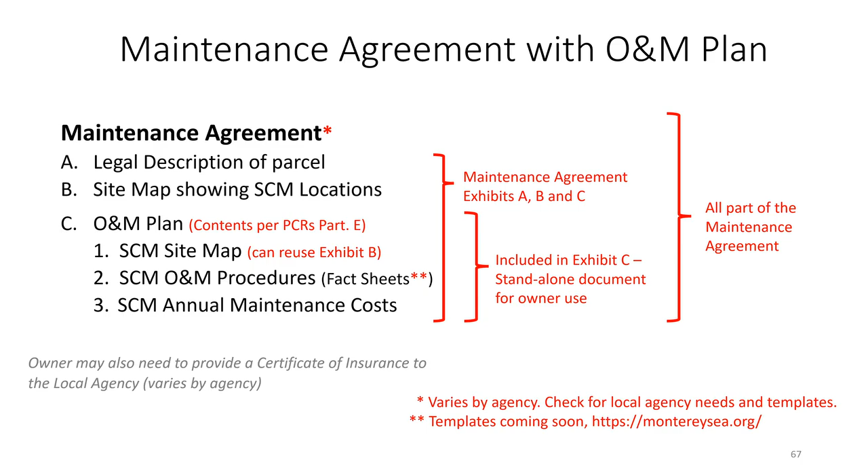Depending on the agency process, it can take one to two months to get this through legal review and recorded on title. And there may be certificates of insurance and those types of things, so things can take time with the processing through risk and legal and all of that. Yep, exactly. Thank you.

As Valerie mentioned, Exhibit B should be formatted black and white. You can expect the scan to come back to you rather poorly after it's recorded, so don't use exquisitely small fonts, don't use gray hatches, keep it black and white with minimal content.

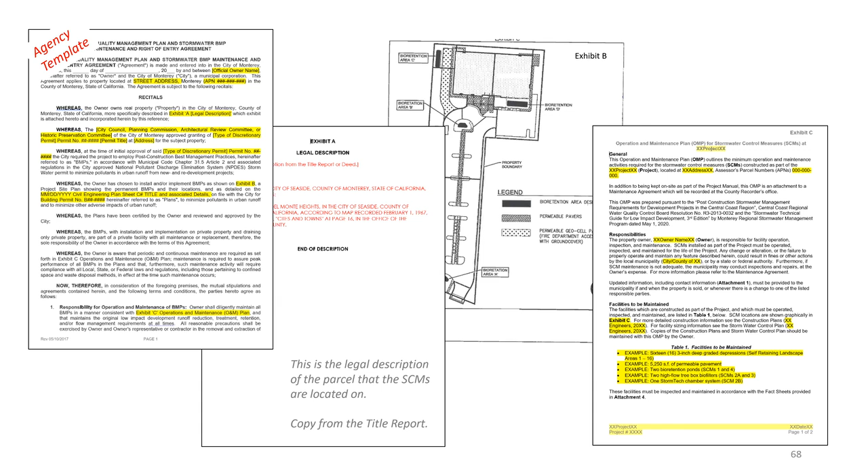And I think I heard, Jeff, that you guys approved the O&M fact sheets yesterday. So those are going to get posted to the website. That's a huge help, so we've got those to start with.

So just from the agency standpoint, related to when we get to this point of construction, communicate with the agency inspector on what the schedule is for the SCM or PCR features construction.

Those features will be inspected by the design engineer, hopefully, but also by the local agency over the course of that feature's construction at the intervals that Nathaniel had described. We do recommend that the design engineer is on site for those agency inspections, so if there are any questions, they can answer them.

And then the PCR, the certificate at the end, is a helpful record related to ensuring that those features have been constructed in conformance with the PCRs.

As we've already stated, in advance of the final certificate of occupancy, coordinate, communicate, and make sure you get that maintenance agreement executed. We actually, at our agency, record the document over at the county on the deed. And as I said earlier, the exhibits to the maintenance agreement are key. They need to serve the long-term, in perpetuity, of that built project for every owner along the way. So it's really critical that the O&M plan is accurate and clear.

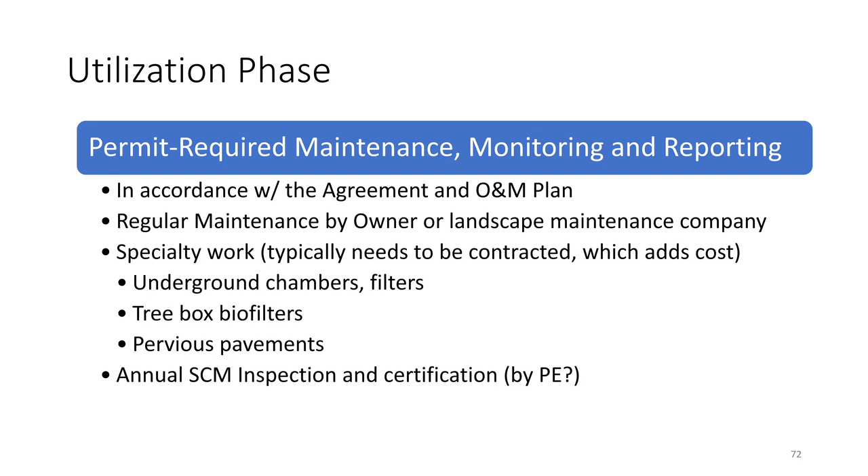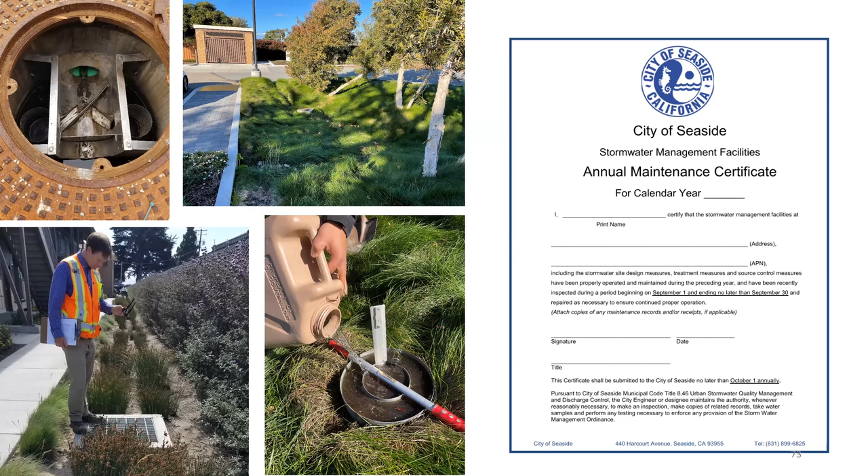Here's an example annual maintenance certificate for City of Seaside. Some photos of me doing annual inspections of various facilities.

Tricia, do you want to? Yes, thank you. So at this long-term, in perpetuity of the built project, or the utilization phase as we call it, what I found is the first few years it's a bit of a learning curve for the owner. Their team, their project team, may be very familiar with all these facilities, but it is typically a bit of a learning curve. And so I have found that there is some guidance required at times.

And then those records that are both given to the owner and maintained by the agency are critically important, because not only do they allow the current owner to understand what needs to get done, on what frequencies, and how, but it also informs any future owners as well as any future development on that same site. They can understand if, oh gosh, this future redevelopment that we're going to do on the same large parcel is actually going to encroach into one of these bioretention facilities, so we need to rethink the bigger plan in the next project. So it's really critical to have those records.

Yeah, and I'll just say these are encouragements to the designers in the room. Take time for lessons learned. Unfortunately, that's kind of a piece that can get left out in the hustle and bustle of every day. But the lessons learned are important - they inform our future projects, so the mistakes that we made don't get made on the next project.

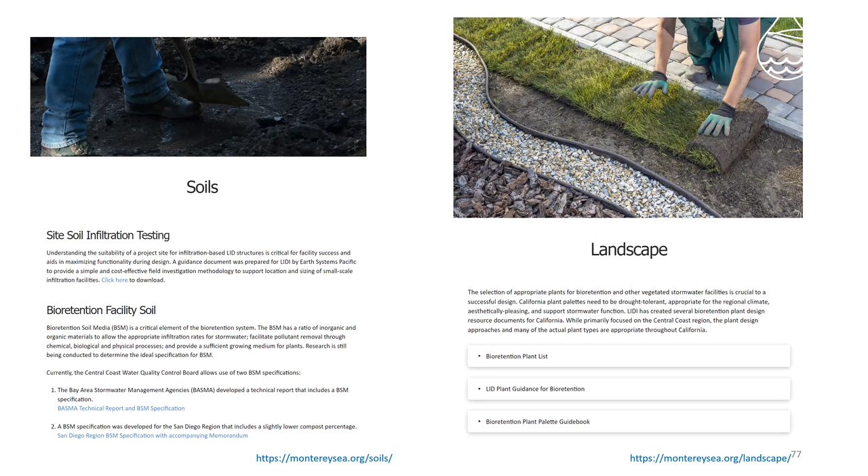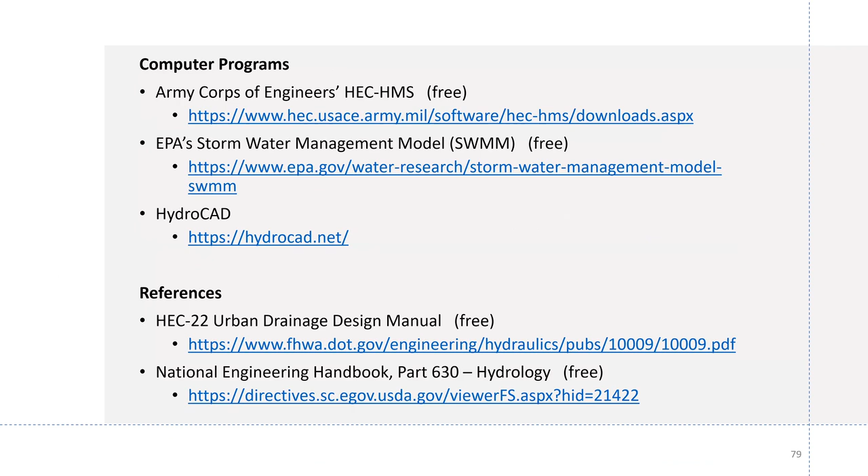Similar to Valerie's slides, we have some slides here at the end with some web links. These are actually screenshots from the MRSWMP website, with links to some other really good stormwater control measure details and computer programs that we've talked about.